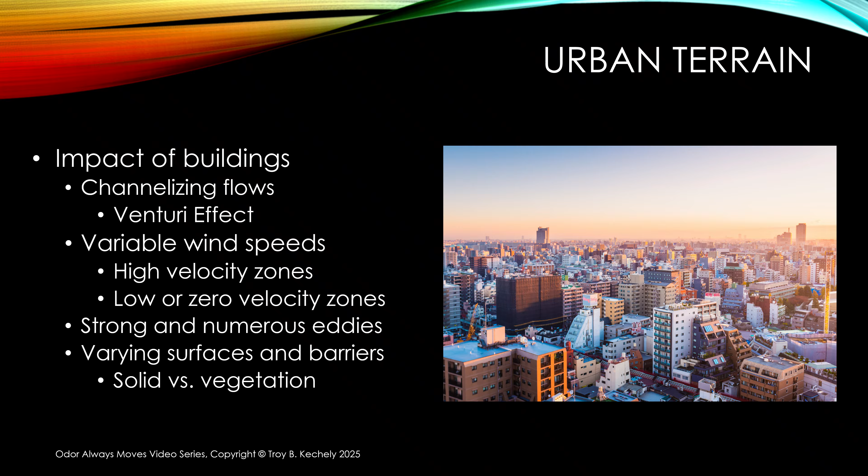Now, with urban terrain, shapes matter. You can see on the right I've got two shapes, a cylinder and a cube. You can see the flows going around them, and you can see the eddies on the downwind sides. On the curved shape, those eddies are pretty minimal and not that significant, whereas on the cube shape, those eddies are more pronounced and a little bit faster. That's simply because the air has to work harder to get around that.

And then once it gets on the backside, there's no smooth pathway around, so it basically creates areas of high turbulence. We've talked about this before: the higher velocity flow around the sides pulls the air close to the backside in, creating a circular motion. The biggest thing to understand is that those sharp angles create more turbulence, which decreases your odor concentration on the backside of buildings. It moves it around a lot, and it makes things a little complicated for your dog.

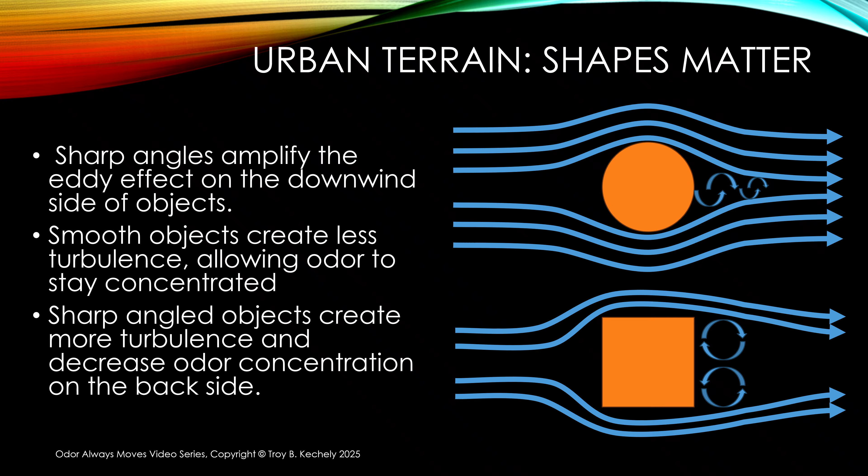Now, this is the same shapes, except this is an actual CFD model, and this just shows you the differences in turbulence between them. On the downside of the curve shape, yeah, there's turbulence, there's eddies, but it's somewhat localized and not that dramatic. You can see these particle flows are nice and laminar in many regards, and it starts getting some turbulence down here. On the backside of the curve, that turbulence zone will vary as it goes.

But look on the downside of the cube: you see these real high velocities, really sharp angles, and the result is these very large extended areas of turbulence downwind. That's what I'm talking about. The areas of turbulence on the back downwind side of the building can be extensive, and the higher the wind velocity, the more extensive and turbulent they're going to be. So just something to keep in mind.

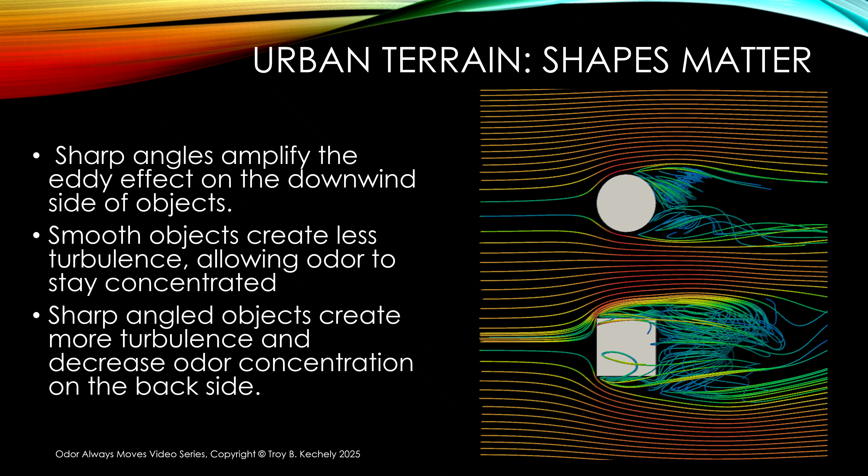Now, the Venturi effect. This is just a principle where the pressure drops and the velocity increases as the fluids pass through a constricted opening.

So if I have a pipe here, this is just a cross section of pipe, and say these are the pipe walls, and I have a flow going through it, and it's just moving right along, nice and steady, nothing fancy. Okay. Unrestricted flow. That's what we're talking about.

But now I have the same pipe, but I have a constriction right here. Okay, so I have the pipe diameter here, and then that pipe diameter reduces. Okay, what's going to happen is that flow is going to come along, and in order to go through it, it's got to speed up. Okay, the pressure drops, we don't worry about that, but the velocity increases dramatically. Then it slows back down to its normal pace.

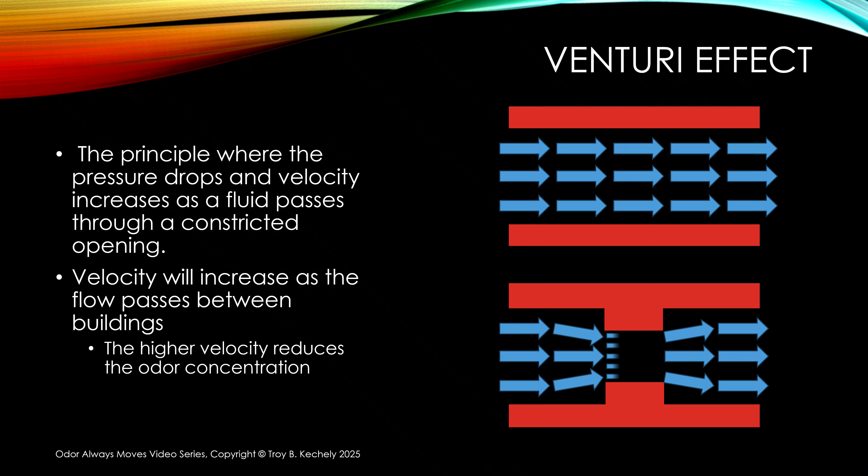That's going to be a factor in an urban terrain because we have these narrow streets that constrict the flow and will increase the velocity. Now let's take a look at that. And we're going to look at two different scenarios. One's parallel wind flows, where basically the streets and the buildings are at 90 degrees in relation to the wind.

And so I have a scenario here, and I have three odor sources. So you're going to have to mentally kind of keep track of this. So this source up here, and these are all the exact same odor amount. They're basically simulating the odor from a person. So if you guys are trackers, urban terrain or law enforcement who are dual purpose tracking and apprehension, this applies to you. But the principles apply to anything in the detection world.

Okay. But this odor up here, the blue one, so any of the blue odor is going to be coming from this source. He's on the upwind side. There is no obstruction upwind of him. Okay. And then here, this is going to be the interesting one that I'm really going to want you guys to watch, is this red one. This is up on the roof. It's about 10 feet up, so about 3 meters. And it's above street level. He's on top of the building. He's on a roof. Okay.

And then this third one, the yellow one, he's downwind. He's not only downwind of this structure here, but he's also downwind of this large building here. And that's going to all influence things. And then I just put in some canine teams, and we're going to look at a ground perspective from one of them just to give you an idea. And I have ground views of others, but for this video, we're just going to look at this one here.

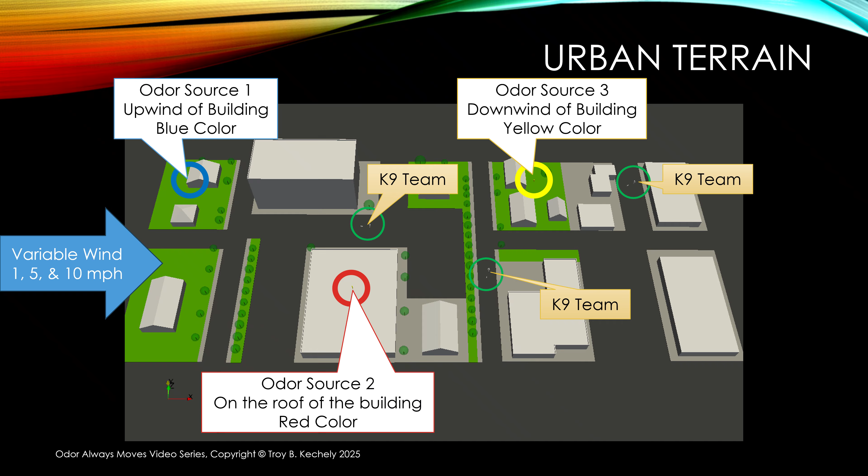So let's just start this. This is 1 mile per hour. You can see the odor plumes moving. And this makes sense. 1 mile per hour, nothing too dramatic. And we're going to look at the dog zone in a bit, and that'll help clarify some things. But you can see that odor in the low wind speeds, it reaches out there quite a bit.

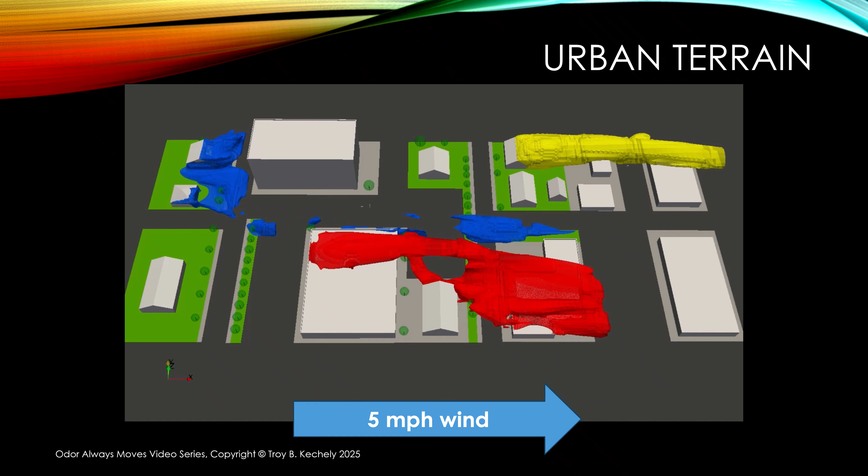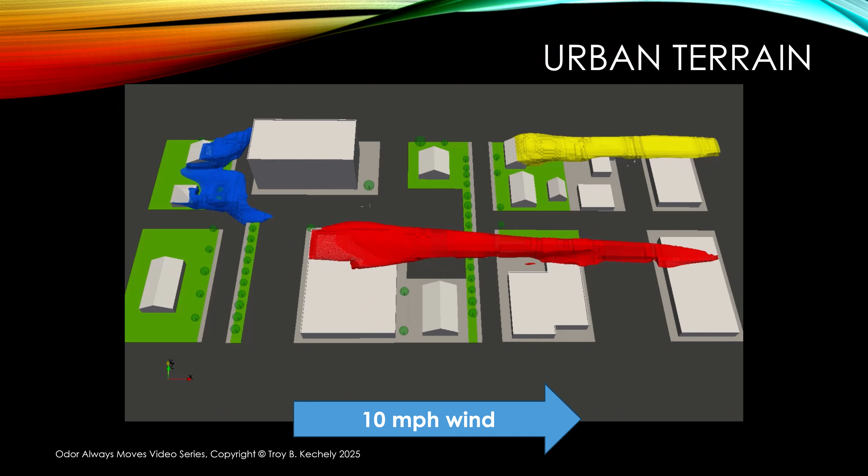But now we're switching up to 5 miles per hour, and you're going to start seeing the shift in terms of the turbulence. And then also the odor plumes start constricting and start getting more or less concentrated downwind. And then that's only going to be amplified when we switch to the 10 mile per hour wind speeds, which it just did. And if you notice though, this area down here, that blue reached all the way down here at the 1 mile per hour, but it's not coming down there at all now. Okay, so it's staying well up by the source.

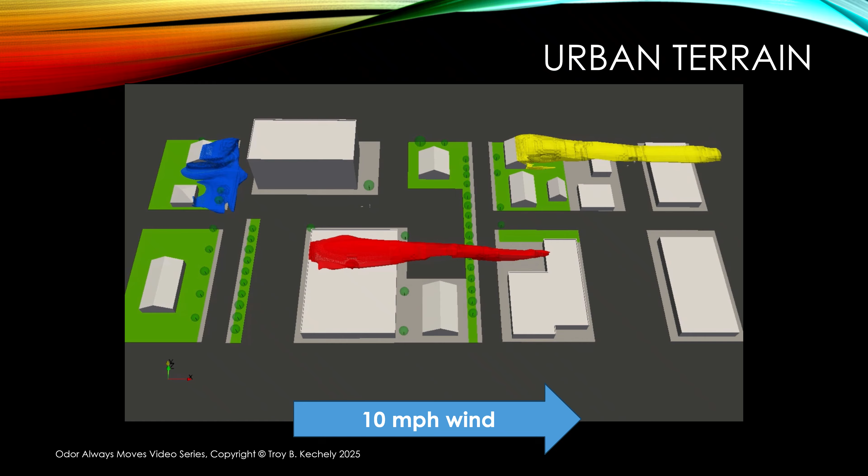Whereas this one down here is reaching clear downwind. But if you notice, it's actually above the street. This is actually well above the street. Dog wouldn't detect it at all. Same with this one, very high level, and it's staying above ground level. Okay. Now let's take a look at the dog zone. Okay, we're only going to be seeing the odor that's from the surface up to about a meter.

So as expected, not seeing much of the red, but all of a sudden there's a red pocket there. There's another red pocket there. This one's moving down, this one's out here.

These are all making sense, but notice that odor source is 12 feet above the ground, and he's creating large plumes, but these plumes are not staying stable. They're mixing up. As we switch to the 5 miles per hour, you notice this odor plume reached down, but now it starts constricting back.

And these reds keep popping up, but they disappear. They pop up, but they disappear. And now at 10 miles per hour, kind of the same thing.

Not much downwind for the dog. Not much downwind for the dog. And then all of a sudden, boom, I have this pocket of red, and then it disappears again. Okay, and this makes things a little complicated.

And again, this is now at the 10 mile per hour range. But just because you're downwind doesn't necessarily mean your dog's going to be in detectable odor. And that's because of the terrain.

So let's take a look at this from a different perspective. This is just a particle streamer, so this is just looking at the pathway. This is the low velocity, the 1 mile per hour.

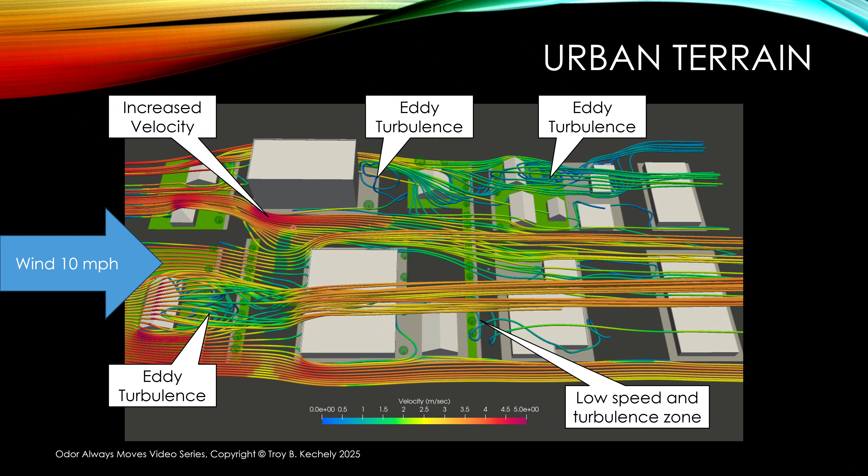So we're going to look at this area a little bit more in a bit, but let's talk about this one. This is just a slice, about 1.5 meters, 2 meters off the ground. I think it's a meter.

And you can see how much faster that velocity is. And so as we've shown in other videos, the higher the velocity of the airflow, the lower concentration of the odor that's going to be available for the dog.

And that is why you saw the odor have that nice blue, that nice big odor plume from the blue odor reaching all the way down here. But as soon as that wind started picking up, this area in here became faster and it's not able to maintain that concentration level.

Okay, so the dog may actually pick it up, but maybe it's such a small level, or if it does pick up a concentration that it can detect, it'll be fleeting. And so it's something to kind of keep in mind as you're working in those high wind conditions.

So, but this literally is the Venturi effect right here. You have this constrained flow area, and the wind, the fluid, has to accelerate to get through it. And that's all that's happening. And because of that acceleration, the odor concentration reduces.

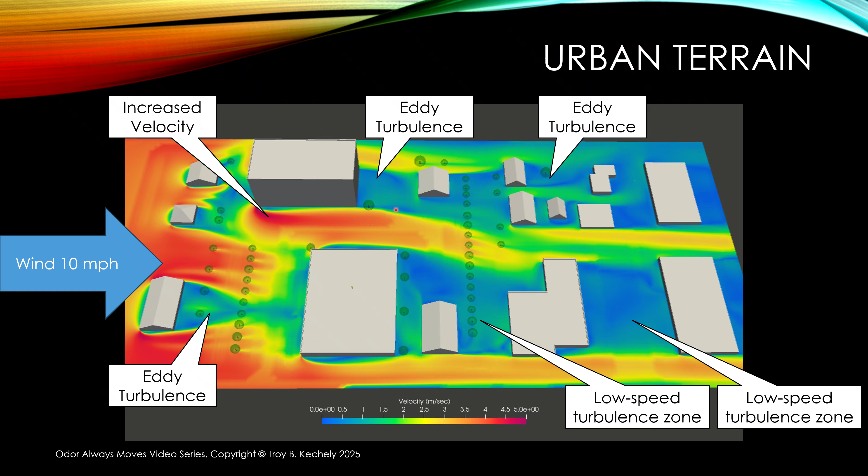Now let's take a look at this area down here where we were seeing those pockets of red pop up and then disappear, pop up and then disappear. If I took a slice right down this plane here, you can see all these nice red arrows are nice and straight. They're our normal velocity. This is what we call our laminar flow, which means the velocity between layers is consistent, so there's no real turbulence and interaction.

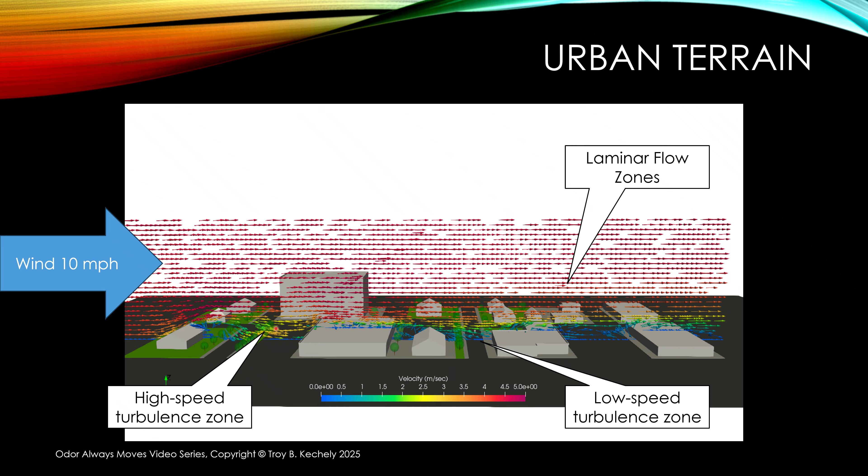This is nice, steady flow. This is what fluids like. They take the path of least resistance. They're lazy. They want this laminar flow, and they will always revert to this and try to establish it. But once you get down here, it starts getting a little more jumbled because you've got these objects, you've got the trees, and that starts influencing it.

This is just another picture of that. I have this beautiful red, showing our consistent velocities. As we start getting down towards the buildings where we start having turbulence, this laminar flow starts breaking down, and you can see this dividing zone here. This area below it is our turbulence. It's a little bit more turbulent, so I have low velocity, high velocity. We saw that curving and that rat's nest area behind the building.

But this is the one that's interesting. Not much going on down here—there's turbulence, we saw the particle streamers, a little bit of motion in there, but not much. Same with back on this side. So what's going on?

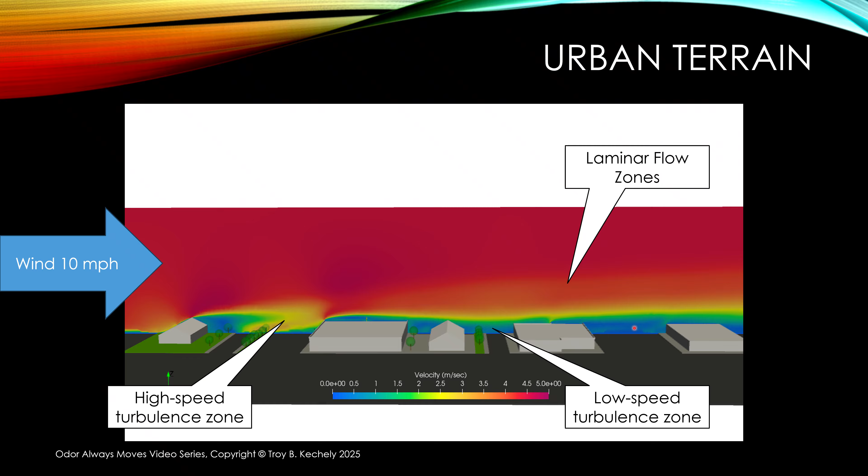Well, as we look at this, we've got our flows. It comes up—we've seen this graphic before—comes up over the object, goes over the top, creates a turbulence zone, and then that eddy on that backside. It's high velocity, but because fluids want to get into that laminar flow, they're lazy. They come over, and if those objects are too close together, the flow says, I'm not going to waste my energy and go down in here—I'm going to go right over the top, and when I have a landing zone with no more obstructions, I'm going to drop down. That's why you see that stronger eddy on this backside, but very minimal movement down in this zone here.

That's what's occurring—it's a very low velocity relative to the overall flow. So odor does get pulled down into it and is able to concentrate because it's low velocity, but it's still turbulent, still moving around. That's why it doesn't stick around; it's not like a nice steady pool. It's getting moved around, so it does get diffused. That's why you'll see these pockets.

But when you have buildings close together, or any objects really—you can see it in vegetation as well—that laminar flow will always want to go up over the top, and there'll be some turbulence down below, but it'll be low velocity. So keep that in mind with regards to tracking or doing detection work between buildings and stuff. That can cause the odor to do some weird things that may be hard to visualize in your mind when you're running it.

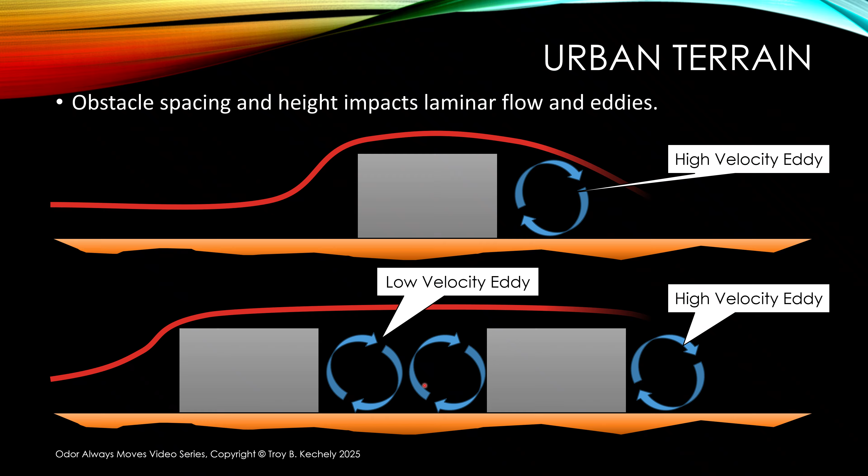So let's take a look at the ground level. This is that red odor up here, and here's my canine team. We're just going to run it. You know there are three different velocities, so let's see how that red odor looks. And remember, he's up here on top of this building.

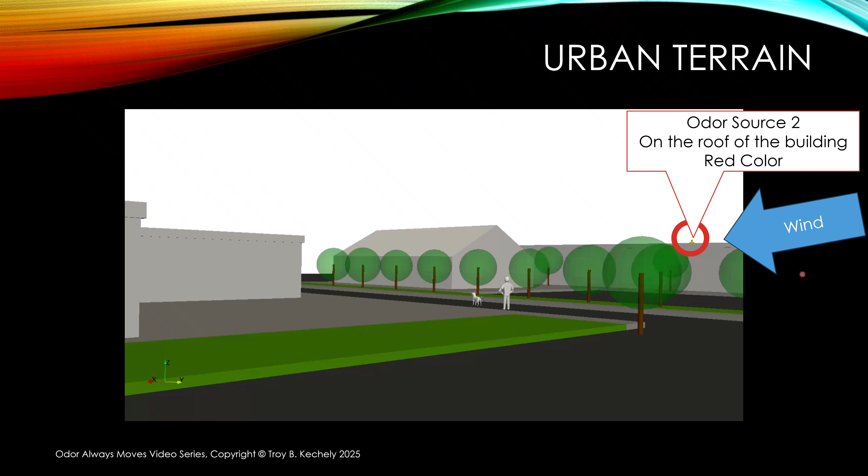You can see it running out, drops down to the ground a little bit, then it's up again, and you can see it drop down a little bit. It's up again, almost inundated with odor, but then it gets back up again. And you can see that there's a lot of variation in where the odor is in terms of where the dog can detect it. It's kind of all over the place. Keep in mind, this is sped up, so it'd be a little bit slower in the real world. But it is important to understand the influences of terrain and trees, and just because my dog is getting into odor and acting in odor, I have to be mindful of what the wind is doing, and whether the source could be in a place I'm not expecting.

That's going to come down to reading your dog and being aware of your surroundings and terrain. Hopefully that gives you an idea of how complex an urban setting can be in a windy environment. That odor was dropping down, then it was gone, dropping down, then it was gone.

So it's not an easy situation, and nobody give me any grief because I have a tree that's outside of my landscaping and I screwed that up. Yes, I have a tree in the middle of my street, but that didn't affect the model. Just so you guys know, these trees are mimicking vegetation. They're a porous zone, so they are actually acting like real trees in the model space. They're not just there for looks.

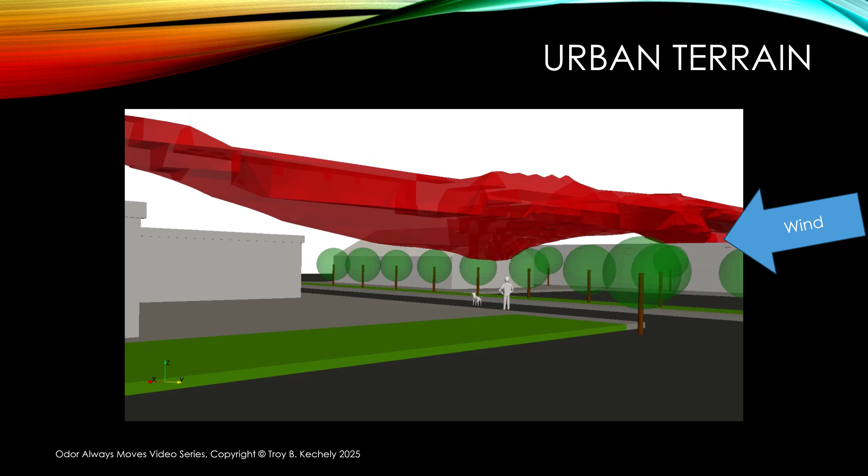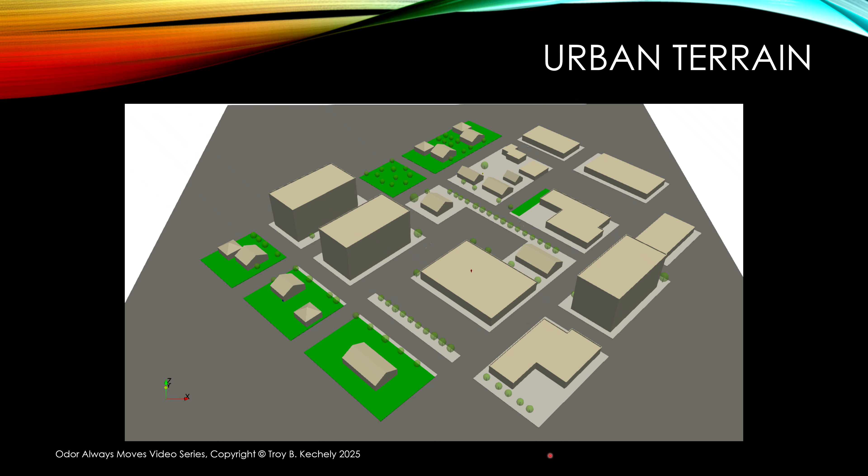So let's take a look at angled wind flows. This is where the buildings are rotated. Here's our environment - basically the same model, but I added some buildings to give it more depth. If you notice, it's angled now, rotated 45 degrees. Our odor sources are the same.

This is the one that's upwind of that building, this is my odor source up on top of the building, and this is the one down low - same colors, so there's no confusion. I still have my canine teams, but we're not going to do ground views of those. I have that information, but may save that for later on down the road.

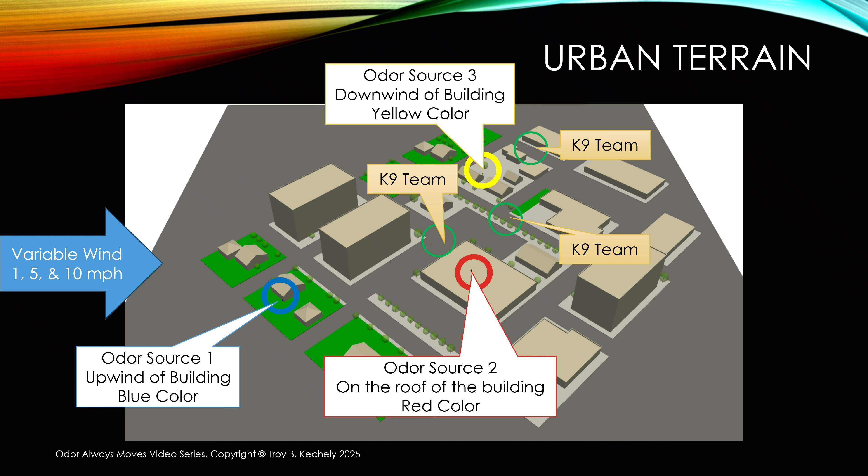And the wind's going to be the exact same: 1 mile per hour for the first third, 5 miles per hour for the second third, and then 10 miles per hour for the last.

So as we start running, we're just watching the odor plumes, the total odor plumes. We'll do the dog zone next. You can see the 1 mile per hour, everything's really making sense, nothing too dramatic. And, you know, where things start getting weird is right here.

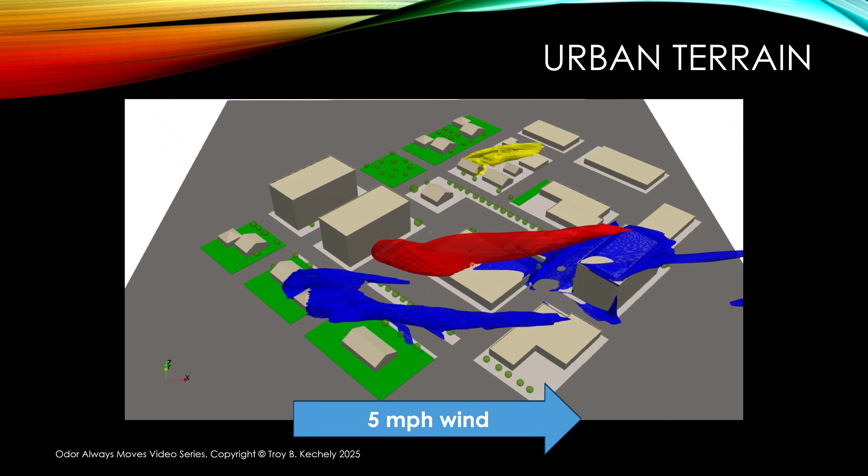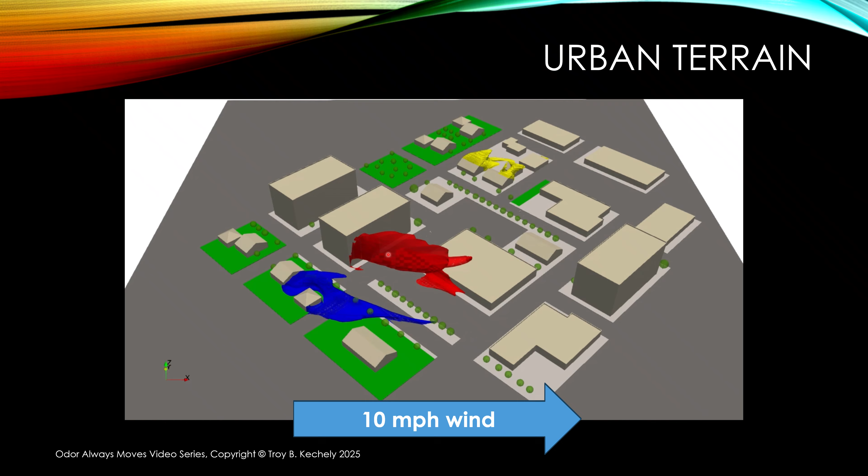If you notice, that odor went backwards - it went into the wind, and it's sticking on the backside of this building. Now we're at 5 miles per hour, and you can see the odor concentration is reduced dramatically, but this odor is literally going against the wind. Look at that - keep in mind what direction the wind is, and look at how the odor is moving. The blue and the yellow are doing what makes sense. The red's really complicated, and it's literally going against the wind, at least the regional wind.

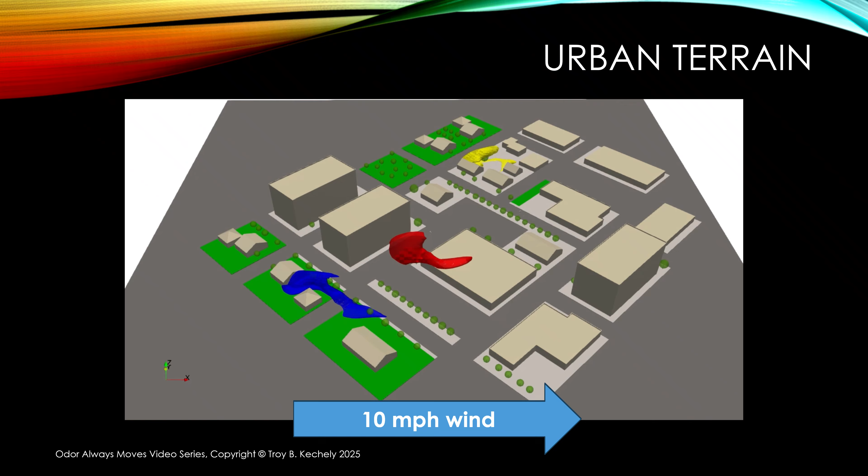This is what we're going to see here in a little bit. Let this finish out. Hopefully this gives you an idea of what's going on - we've already given you the tools, so hopefully you can grasp what's happening here. Let's look at the dog zone.

Again, blue and yellow are nothing too exciting. You're going to see the red start coming into play down here - yep, it's starting to pull downwind. This is low velocity, 1 mile per hour. All makes sense, nothing too dramatic there.

But notice the blue down here - this is the one that's interesting. Notice how this blue is now pulling in terms of the dog zone down here, and then you have this big gap of odor availability. Keep this in mind if you're doing detection work. Then obviously now in the 5 mile per hour, this is where the wind starts pulling back, and you're getting these ground level odor pools down low.

Now at 10 miles per hour, you're really not seeing anything with regard to the red odor down at ground level. So once the velocity got up, it's pretty much non-existent down on the ground, and somewhat limited for the blue and the yellow.

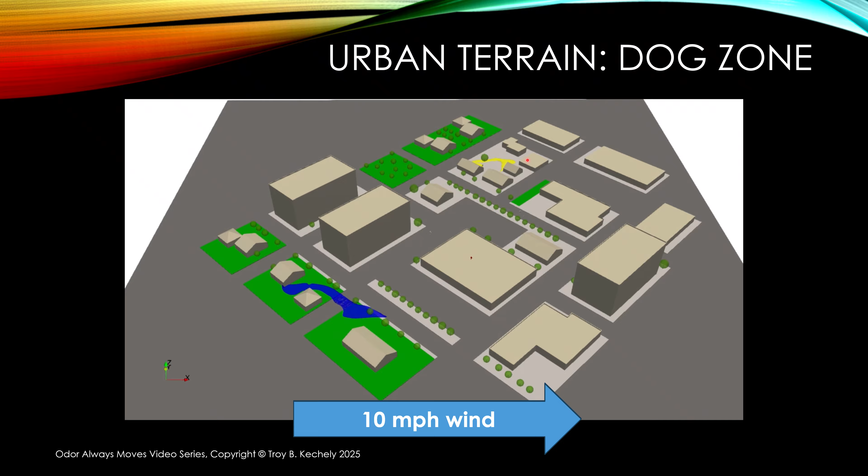So let's take a look at the streamlines, and I'm sure some of you figured it out. There's a lot of turbulence, and that angle seemed to make a big impact on it. The biggest thing is I also have a channelizing effect between these two buildings now, and that amplifies this eddy on the backside.

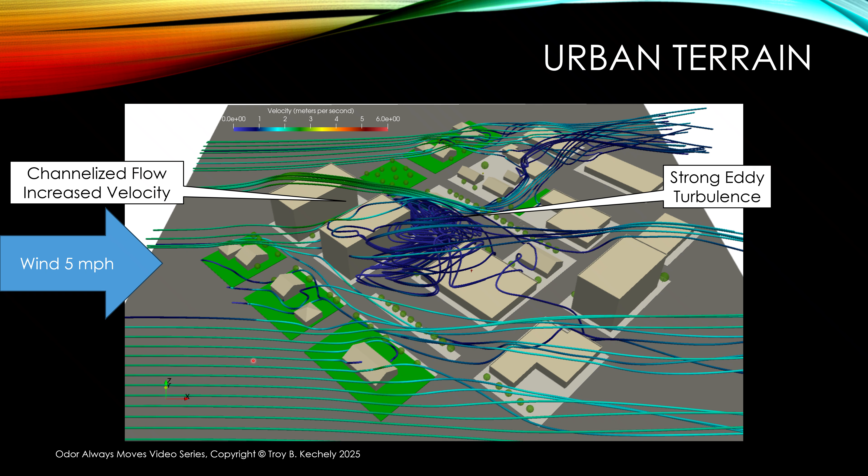You can see that as the wind increases, this eddy effect, this turbulence gets more and more increased, gets stronger, and you start seeing this flow velocity. This green is faster velocity than these cyan colors, which is your main flow of the model. Same thing here. This is now our 10 mile per hour, very strong turbulence, high velocities. That's why the red was basically non-existent once you got to at least ground level in this velocity range. So you can see that those buildings can have a dramatic impact.

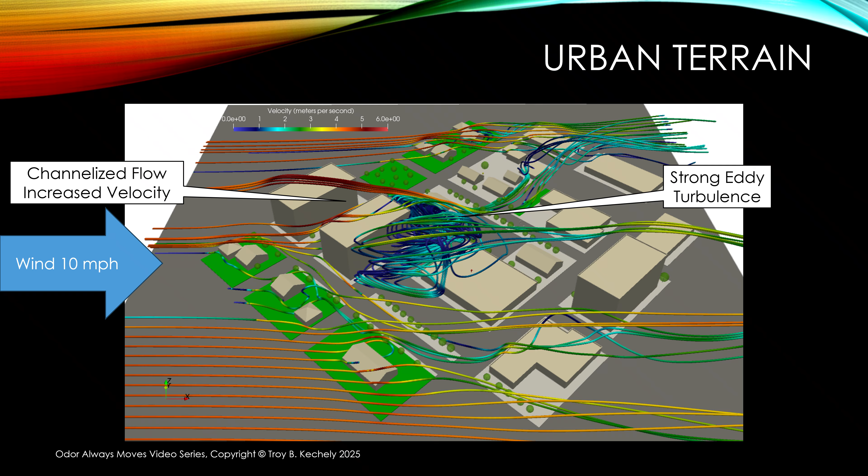And again, it was pulling the odor back into this. It was creating a low pressure area, and we've shown that in prior videos. It was pulling that odor into it and just circulating and diffusing it because of all the turbulence, so the odor concentration would reduce.

So let's summarize things. Sharp angles and varying heights of buildings definitely have a significant influence on air velocity and movement, and in turn that impacts odor. And flows through constricted pathways, thus that's going to increase velocity.

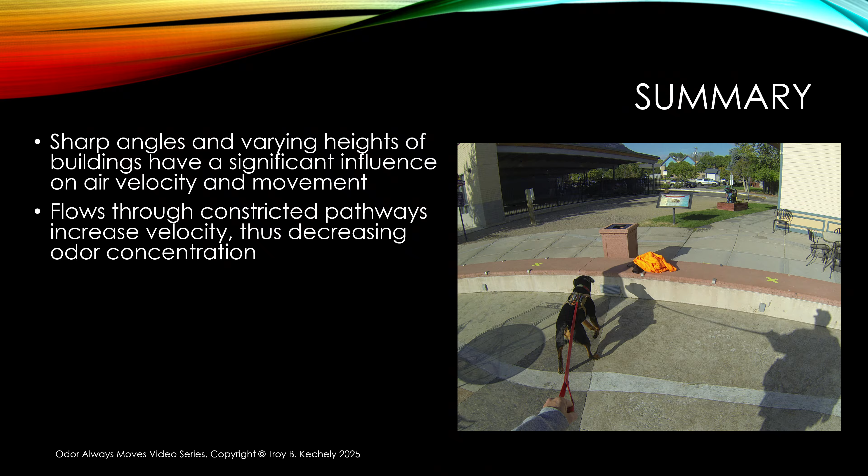Okay, so if I have this passageway here, it's constrained. If I have a wind, it's going to increase the velocity trying to go between these two buildings, right? And that increased velocity will decrease odor concentration, again through the shear dispersion and the turbulence diffusion.

And then we need to be aware of the wind, but we can't rely on it, given that it can change dramatically in direction and velocity over a very short distance. So really, always be focused on your dog, but while being mindful of your surroundings and the wind. You can't rely on it like you can in an open terrain type setting, where it's a little bit easier to say yes, the wind is moving this direction, the source must be in this direction. In this case, that does not apply.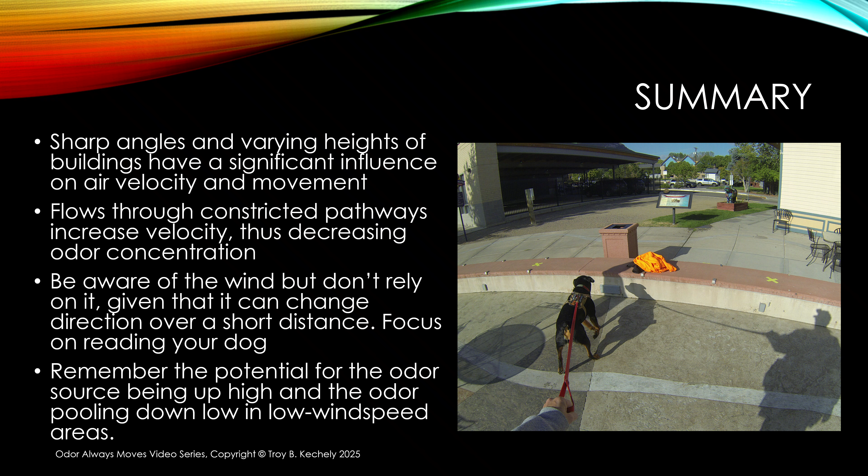And remember that the potential odor source can be up high, and the odor pooling down low and dramatically further downwind than you may realize. It just depends on the wind speed, the terrain, and those kind of things. So it's complicated. I wish there was an easy fix, like oh, this rule always applies. No, the purpose of this video is to show that in urban terrain, the wind is not your friend. It makes your life difficult, and you really have to be on your game. But in the end, you've got to focus on your dog and just be mindful of your surroundings and what's going on.

So upcoming lessons, I'm kind of getting towards the end of my original list of models that I was going to do, or at least videos. I have a bunch more models, but I'm probably going to limit them to in-person training or something like that, probably won't do them as videos here. Maybe I'll do them as a webinar. Right now, the ones I am working on are buried hides. I have some models, I figured out some of the equations, got things heading down that direction. And then one I do want to work on is a true mountainous terrain but with different vegetation zones, kind of going back to the search and rescue roots, kind of going back to my hunting roots, and just understanding in different terrains with different vegetation types throughout that terrain, how does that influence the air movement and the odor movement?